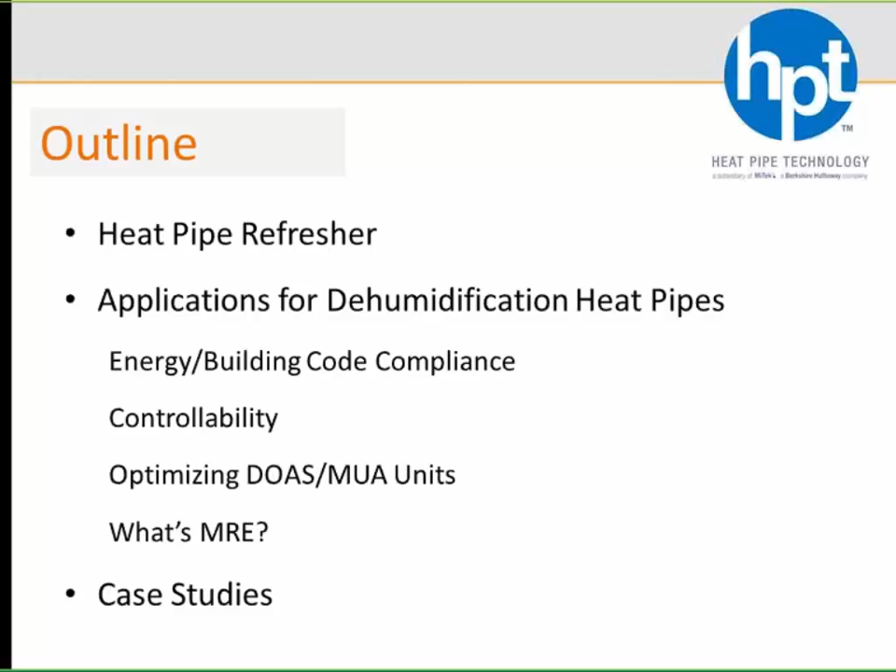So that right there is a basic heat pipe, as it's known today. It's simply a tube with refrigerant in it. If there's no delta T, refrigerant's just going to sit there. But as soon as you apply heat to one side, that refrigerant is going to pick up that heat, it's going to boil, and you're going to create a pressure differential within the heat pipe, and that vapor is going to move all by itself to the other end, where it'll give off the heat to the cooler airstream, and then that vapor turns back to a liquid, and it's going to go to the other side, pick up the heat, turn to a vapor, go back to the other side, and keep working all by itself with no pump, nothing like that. All you need is a delta T. You create a delta P, and that's the driving force within a heat pipe.

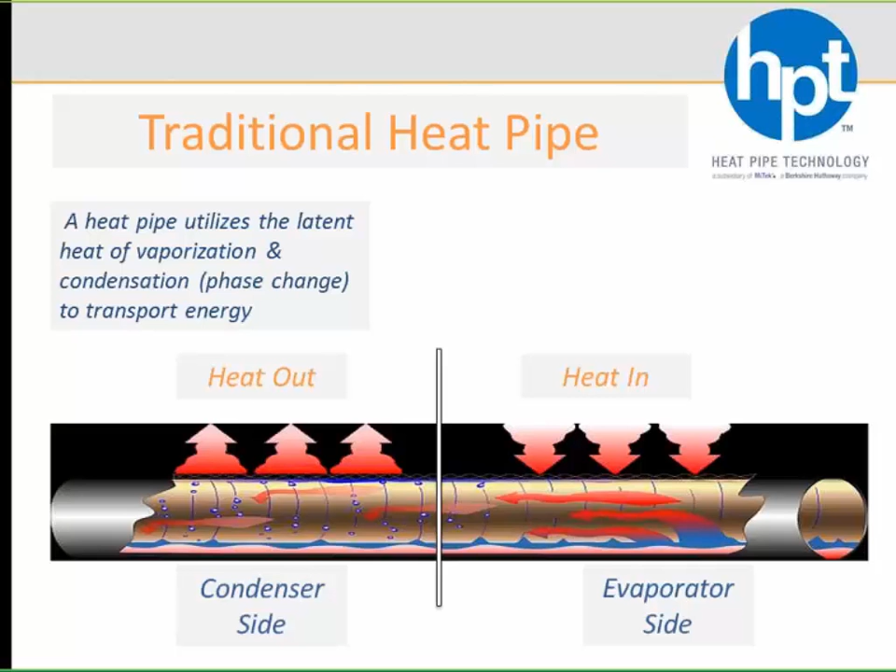Now that's what we call a single tube type circuit, where you've simply got a single tube. We at HPT do it a little bit differently. We use what we call a loop circuit. So instead of the liquid and the vapor traveling within the same diameter tube, battling forces, we've got the liquid going one way and the vapor going the other way, but all traveling in the same direction, like a racetrack, like you see here.

So in this scene, you've got the hot side on the right side. If there was no delta T, you just have liquid refrigerant sitting at the bottom of the loop there. As soon as you apply heat on the right side, that liquid's going to pick up the heat, vapor is going to go up that loop and around to the other side, give off the heat, condense to liquid, and it's going to keep moving in an oval like it's on a racetrack.

The fact that we do that allows us to use smaller tubes. So a lot of those single tube circuits that are still out there today are using big 1-inch aluminum tubes. We're able to use 1/2-inch copper tubes. That allows us to take up less space, get a little bit better performance, add less static pressure to the system, and it allows us to do some cool stuff.

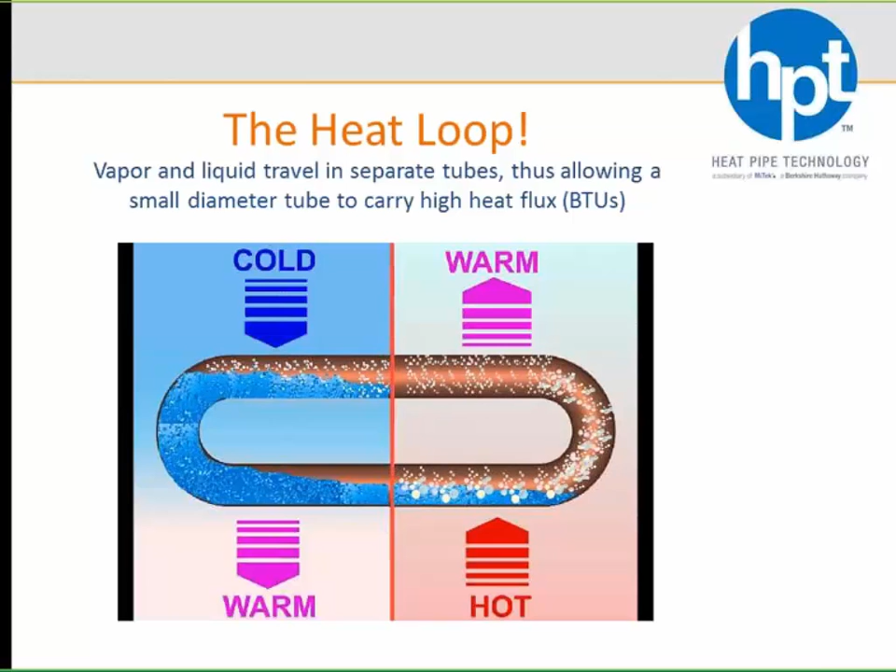So we take that concept and apply it to what we call a wraparound heat pipe. If it were just basic energy recovery, we would put one end on the hot side here and take this 80-degree air, pick up the heat with the refrigerant. It's going to boil, but it's going to go to another air stream and just dump off that heat.

In this case, we're wrapping that heat pipe around the cooling coil so that we can use that heat as free reheat. So as you can see here, we're not only pre-cooling that air before it enters the cooling coil, which is going to reduce the load on that cooling coil, but we're also giving you the free reheat as well.

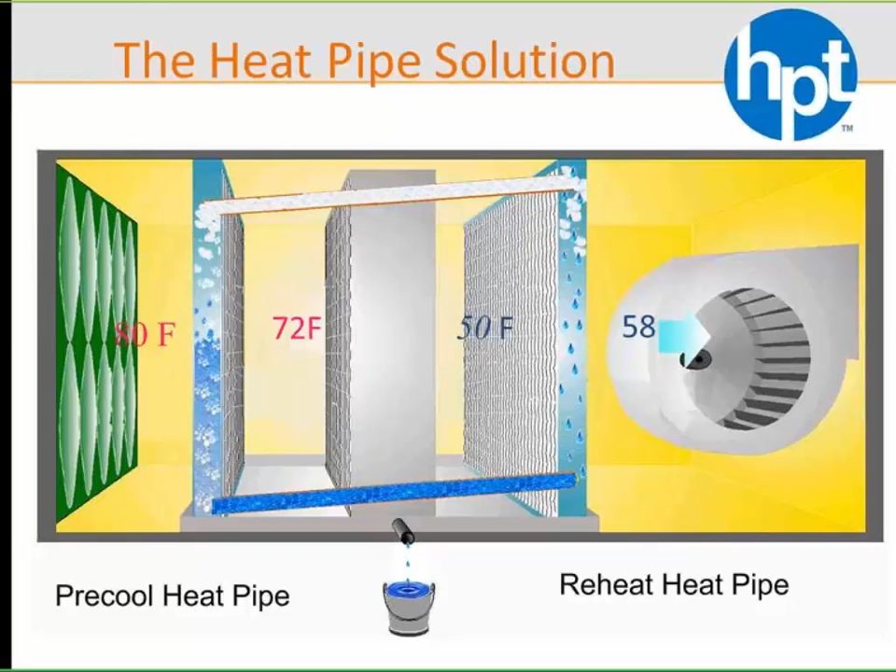And that's really the key to the wraparound heat pipe. If you just want to pre-cool, then just do heat recovery. Don't use something that's going to give you heat that you don't want. But if you are controlling humidity by using reheat, then the wraparound heat pipe is your answer, because it's not just giving you reheat for free, it's pre-cooling that air to do it. So you're doubling up your BTU efforts, so to speak.

So now we're going to look at a psych chart, because no fun webinar is complete without a psych chart. So if we did not have a wraparound heat pipe and you needed to get from 80-degree air down to 50-degree air off the cooling coil, you would have to go all the way from point A through point B all the way to point C, and that's how much coil you need, so to speak.

When we apply the wraparound heat pipe, which is a sensible recovery device, we are going to pre-cool that sensible heat and, in essence, allow that cooling coil to not work as hard. So the pre-cool side of the wraparound heat pipe will pre-cool from point A down to point B.

And now, as you can see, you need a smaller coil because you only have to get from point B to point C. And then, of course, the heat that was recovered from A to B is then wrapped around the cooling coil and added as reheat from point C to point D.

Now, the other way you could do this is if you used the same size coil as before. Instead of going down to a 50-degree dew point, now that coil can handle more latent capacity and drive that dew point down even further as it's able to ride the saturation line a lot further. So we'll take a closer look at both of those scenarios as we move forward.

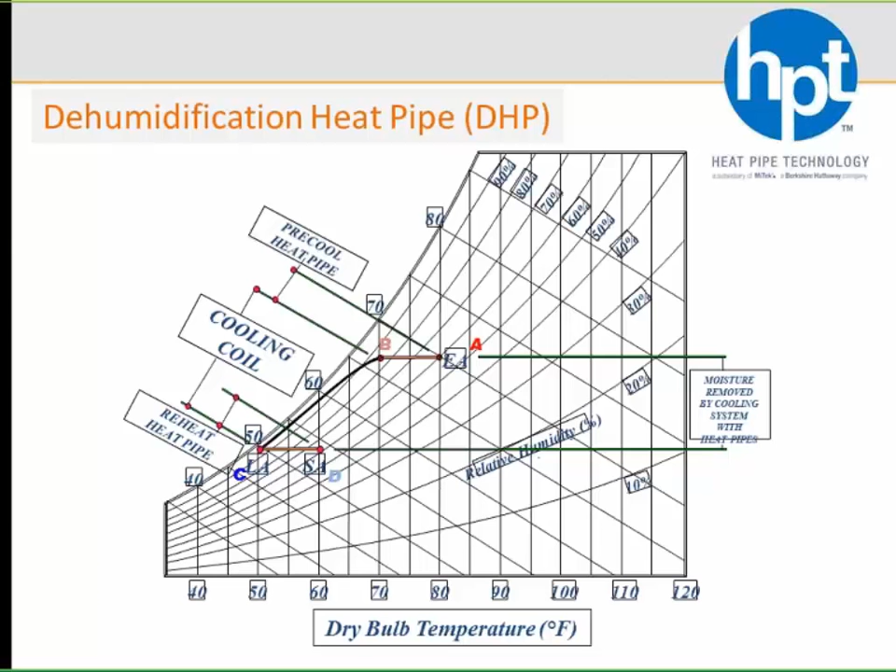I'd also like to point out that the dehumidification heat pipe is commonly known as the wraparound heat pipe, but we have the model number DHP. So when you see DHP, know that that is the dehumidification heat pipe, or the wraparound heat pipe, as shown at the top there.

So one application that it can be immediately used, and is very often used, is to meet energy code or building code. So 90.1, and therefore most, if not all, state building codes that are based on 90.1, are going to tell you that depending on where you are in the country or what climate zone you're in, and depending on how much outside air you're bringing in and what percentage of your total airflow is outside air, you have to have energy recovery that's able to recover at least half of the total enthalpy that's available.

Now, there's certainly ways to do that. A lot of them can get expensive, but there are also some exceptions to that requirement. There are several, but the one I want to focus on simply states: if energy recovery in series, as it's quoted, is used for dehumidification, then you don't have to do anything else to meet this code requirement.

So basically, energy recovery in series, what is that? That's what a wraparound heat pipe is doing. We're recovering heat on one side of the cooling coil, and in the same series of airflow, redistributing that heat as reheat.

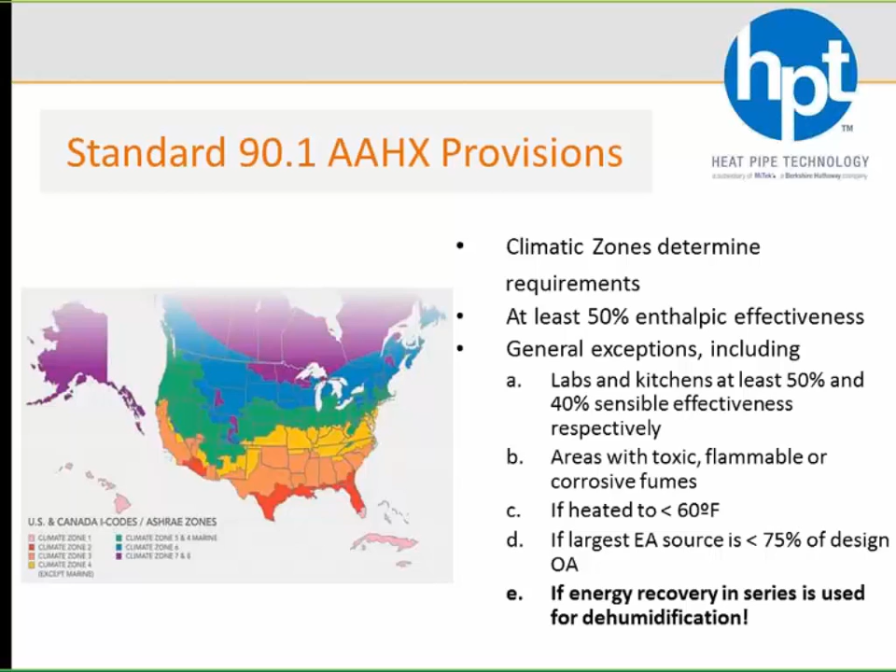So let's talk about controllable wraparound heat pipes, because that is something that's one of our bread and butters that you don't get everywhere else with some other heat pipes. I really want to talk about what it is, some of the details, and then how best to utilize them.

First of all, know that when we're talking about a controllable heat pipe, we are typically using solenoid valves. We're basically installing these solenoid valves in each circuit and shutting them off and opening them back up as needed, staging them together as needed for the BAS, and we'll get into that as well.

These solenoid valves can be either 24 volt or 120 volt, and that voltage is really based on the number or quantity of valves. 24 valves or less, we're going to stay at 24 volts. When we go up past 24 valves, we're going to go to 120 because the wiring just gets too big. That's the difference between the 24 volt and the 120 volt.

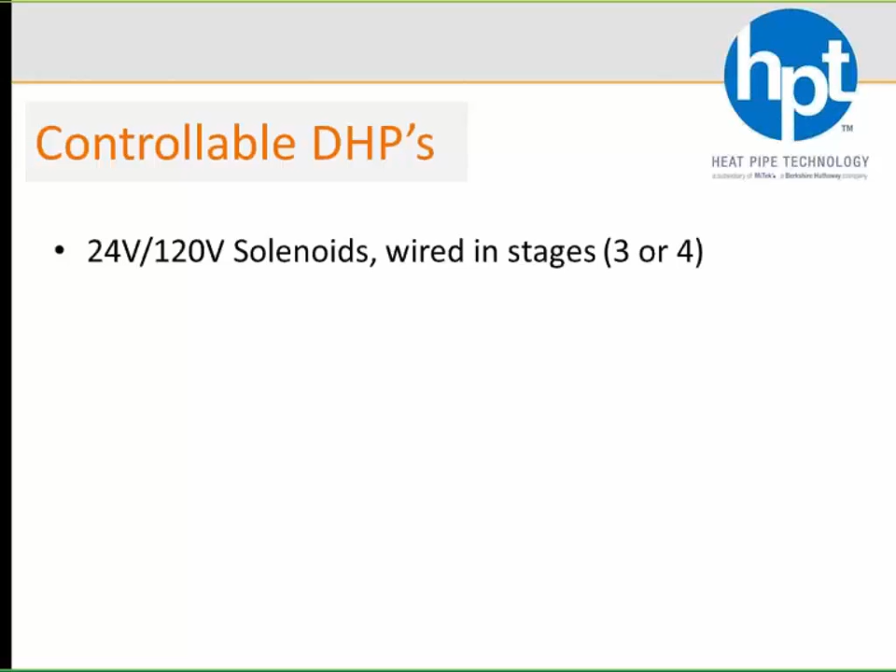Well, the reason is because we slant that piping up towards the reheat, because on the pre-cool side, when we pick up that heat, that refrigerant's going to boil, turn into a vapor, and we want that vapor to go up. And then, more importantly, when it gives off that heat and condenses back to a liquid, it's nice to have that liquid slope down.

So when thinking about that, one question we get sometimes is, what's the wraparound heat pipe doing during heating mode? Is it working against you? The answer is no. When we're in heating mode, first of all, now you've got cold air entering, and that liquid refrigerant is just going to sit at the bottom there, and it's not going to go up anyway.

But also, and more importantly, typically that cooling coil is not going to be on during heating mode, and if it's not on, there's no delta T across the heat pipe, and without a delta T, we're not going to do anything.

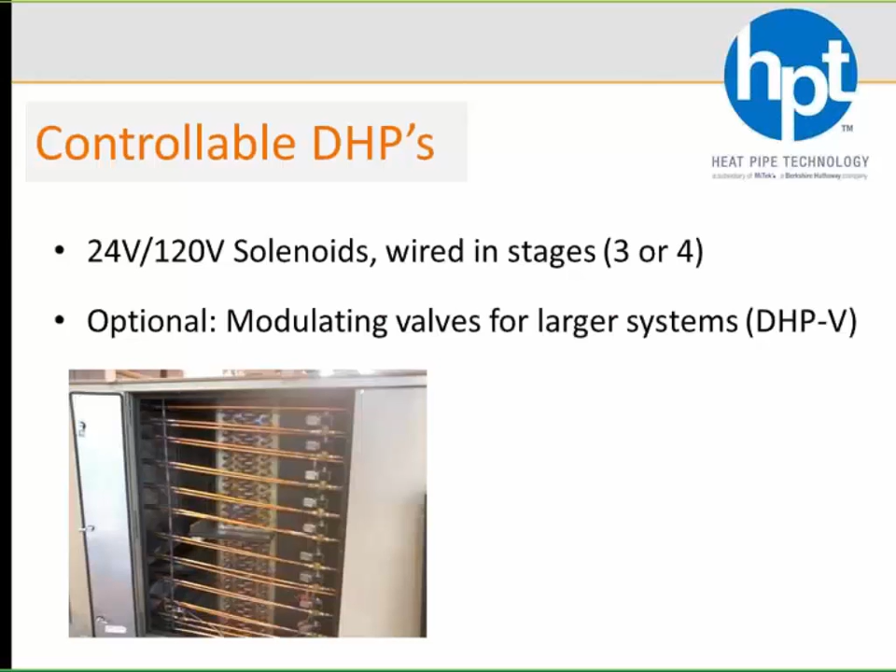Now, when we get into larger systems, and larger systems means a larger heat pipe, means more circuits, and when we get into a lot of circuits where there's going to be a lot of solenoid valves, it gets to a point from an ownership standpoint that it no longer makes sense. And then we do something a little bit differently.

We actually are able to use modulating valves, but we have to use a different heat pipe, what we call our DHPV here. For those familiar with our HRMV, or our split passive heat recovery module, it's basically the same thing, except now we've wrapped it around the cooling coil.

So in this case, we've taken every 2 rows as its own circuit. So what you're seeing there is a 2-row wraparound heat pipe where you've got vertical tubes in this case being tied into common headers. Because the good thing is that allows us to use much fewer valves, and we're talking modulating valves now that can modulate that heat recovery versus just staging it.

The downside here is that you do lose a little bit of performance, because pulling many circuits into common headers is going to lose some performance for you. So we only go this route when it certainly calls for it. We like to capitalize on the performance of the wraparound as much as possible.

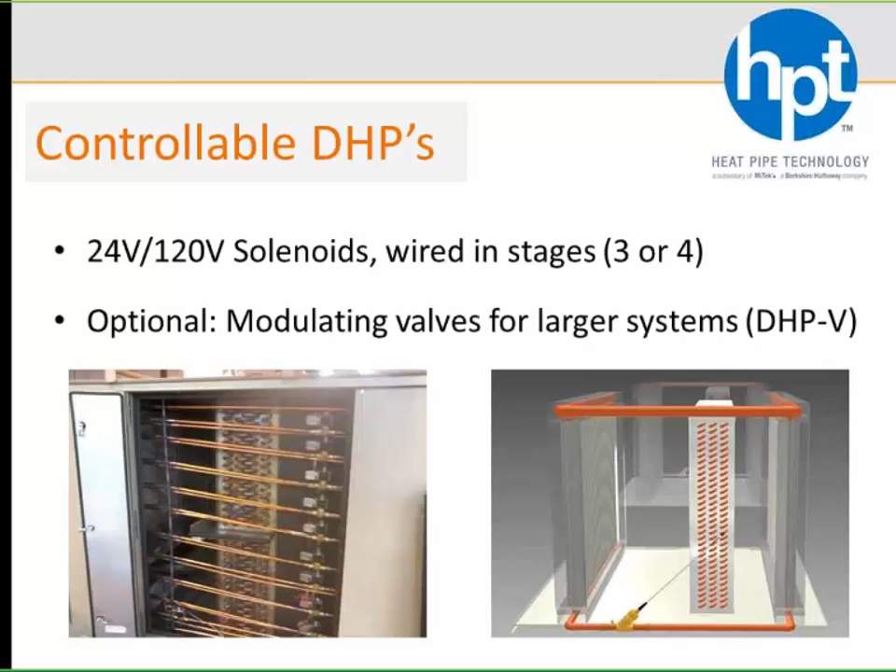So that's what we do. But the big question is why? Why would we even use a controllable heat pipe? Surely it's going to cost a little bit more than a regular heat pipe. That's a fair guess and a correct one. We don't give our valves away for free, so why would you pay extra for it?

Well, the easy answer is that you can control or maintain a set point without overheating. If you're not controlling the heat pipe and it's simply driven by delta T, then if the cooling coil is supplying the same temperature off the coil all the time, but the entering air gets warmer and warmer, that means the delta T is getting bigger and we're recovering more heat and therefore providing more reheat. And you might come to a point where you don't want all that reheat. If you don't have control valves, then you're just going to have too hot air that you're going to have to do something else to overcome.

But if you put control valves on it, then you can stage off a circuit to get that heat down. And if it's still too hot, stage off another circuit until you get it down to that set point that you need. So take a quick look here.

Here's a scenario I ran in Jacksonville, 10,000 CFM unit. We're going to assume that there's 50-degree air coming off the cooling coil, and the maximum allowable leaving air temperature out of the air handler for this design is, let's just say, 65 degrees. So we don't want the air to get any hotter than that. And we'll look at payback and stuff, so we'll use some local utility rates in Jacksonville, but these can certainly be applied to anywhere.

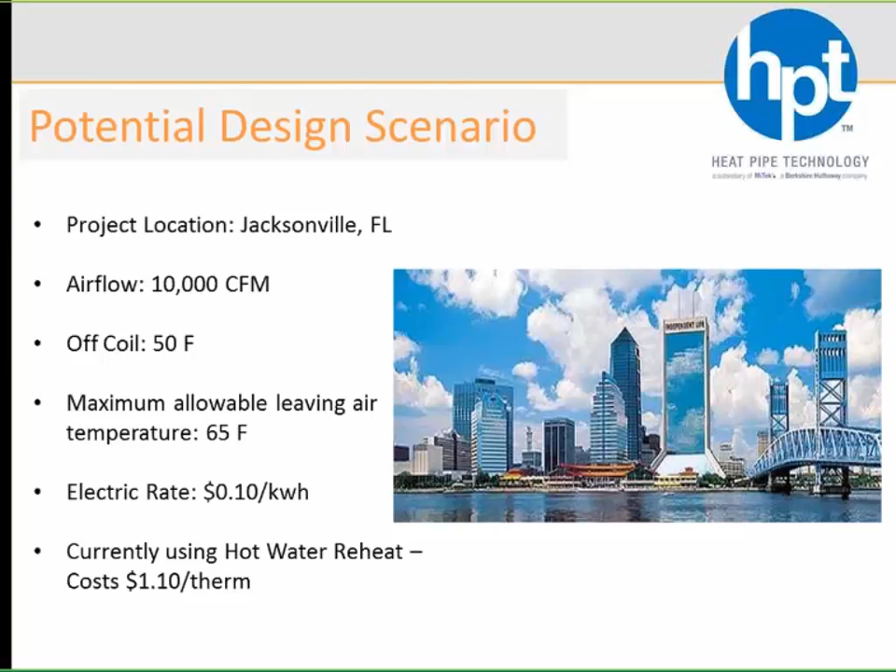So if we took just a two-row non-controllable heat pipe, two-row is pretty common. As you can see, two-row gives you anywhere between 8 and 15 degrees based on that overall delta T. In this case, at 95 degrees, 50 degree air, we're pre-cooling and reheating a little over 13 degrees or so.

So that's great. Now we're heating it up to 63.5 degrees. But if we want to get up to 65, well then we're underperforming. And yes, you could leave it as is. You're never going to get too hot, and you're never going to have to worry about controlling it, and you are good to go. But if your focus is to save as much energy as possible, well then you're underperforming because you're not taking advantage of the fact that you can reheat up to 65 degrees all the time. So how do you get up to 65 degrees?

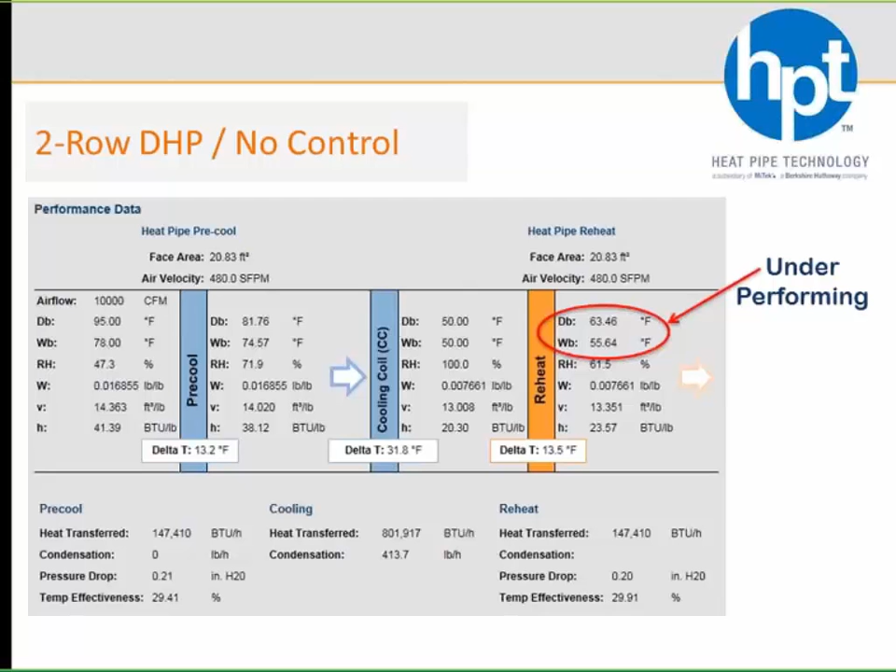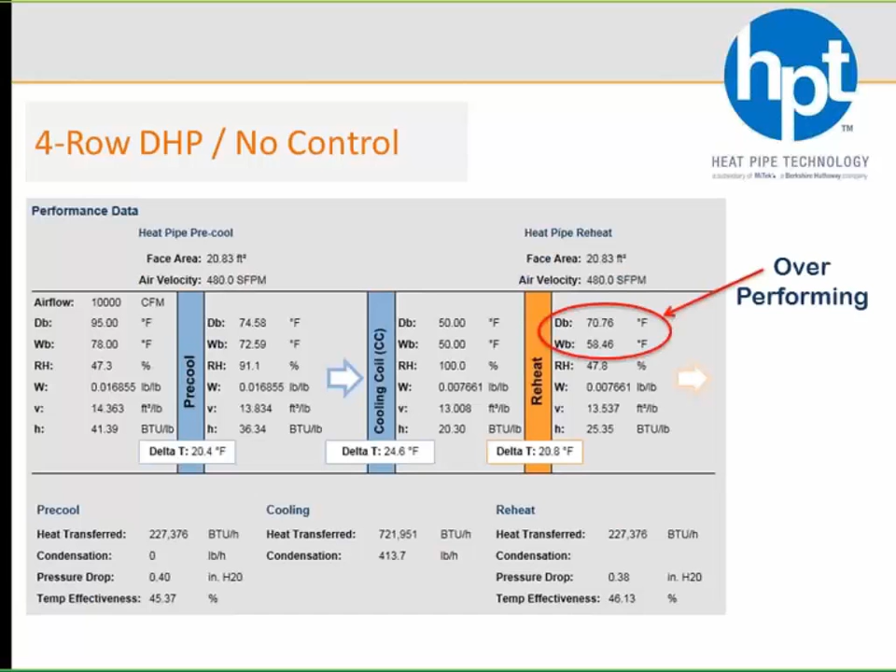You add more rows. So what do we do if we go up to a 4-row wraparound heat pipe? Well, obviously, you add more rows, you're going to recover more heat both on the pre-cool side and therefore on the reheat side. So you can see that instead of reheating and pre-cooling by 13 plus degrees, now we're doing it 20 plus degrees. And obviously, that is too hot. So if you need to get to 65 on these peak days, well, now it's too hot.

So what do you do? You add control valves. So now on these peak days, you shut off a circuit and it's going to back it down to 65 degrees, or if that's still too hot, then you stage off another circuit, and so on, so that you're capitalizing on the allowable reheat as often as possible to maximize the energy savings at all times.

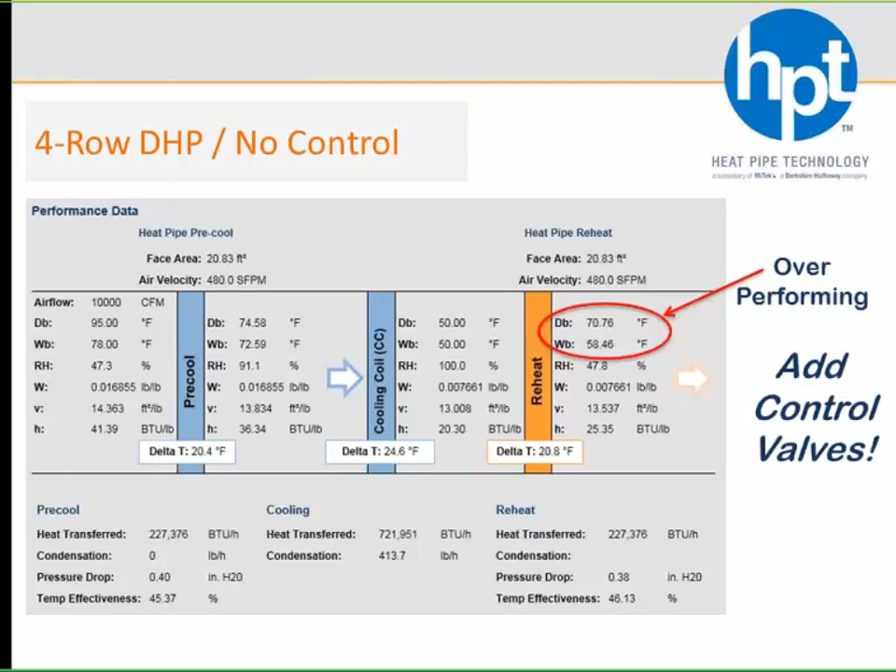So a better way to look at it, instead of just controlling to a set point, is actually sizing the heat pipe for part load performance. Because according to ASHRAE, that peak day is 1% of the time. Now, whether it's 1%, 2%, 5%, 10% of the time, regardless, it's a small percentage of the overall time. So like anything, you hear this argument on the chiller side and other equipment all the time. Why size it for the time where you're spending the least? Why don't you size it for the time you're spending the most?

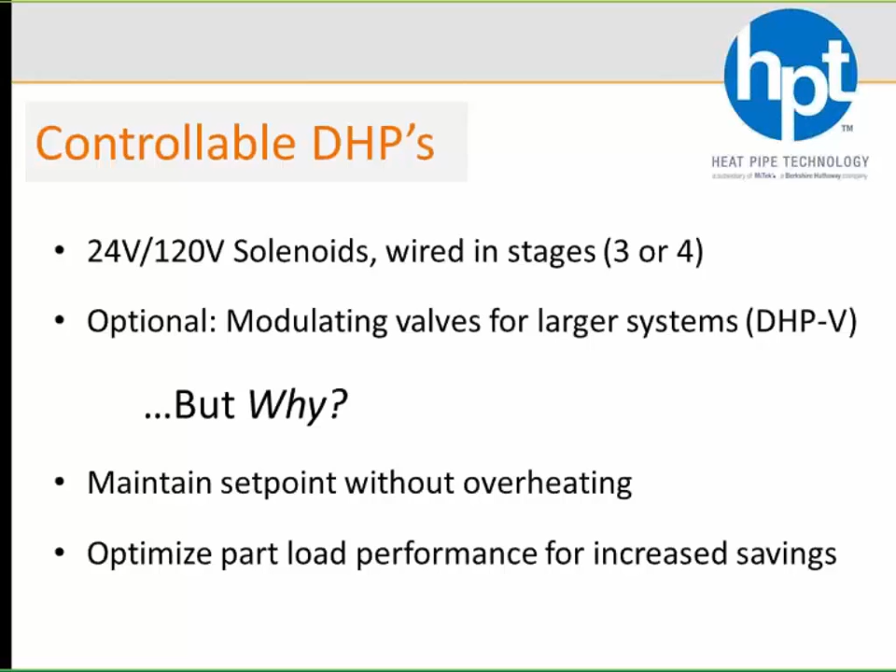So that's you feel the same way about a wraparound heat pipe. Size it for those part load days where you're spending most of your time. Get as much performance as you can, and then on those peak days, just start shutting off circuits so you don't overheat the space, but you're always maximizing your performance.

And that's great savings, nothing wrong with that. But if you want to capitalize and optimize your savings, then not just add the rows, but make it controllable so you don't get too hot on those peak days.

But we're still too hot on those peak days, so we're going to have to shut off some circuits on the very hot days. But the rest of the time, you are getting more BTUs than you would have if you had less rows.

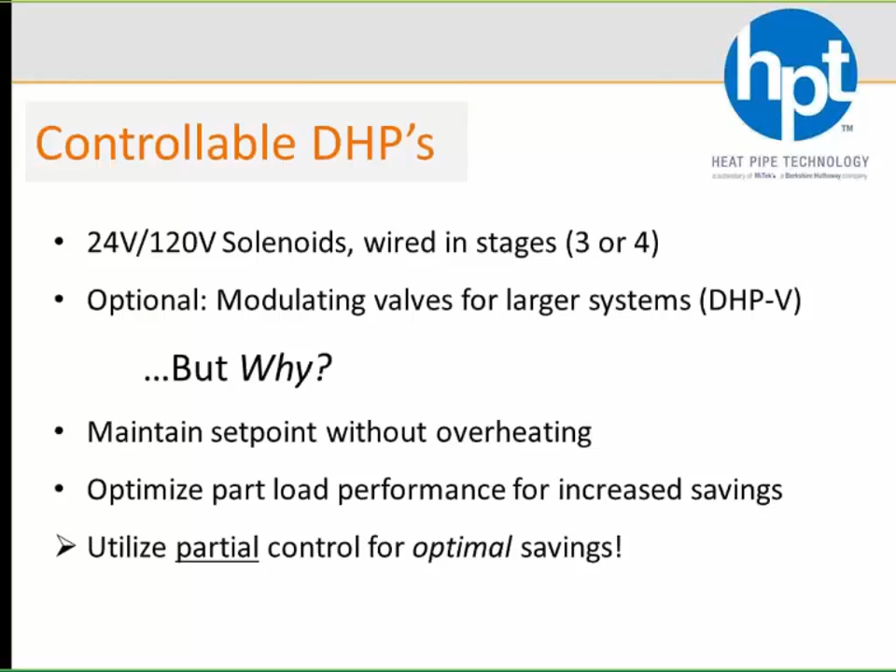If you're always going to need some reheat, then why put valves on every circuit? Why not just put valves on enough circuits to shave the load, to shave that extra reheat on the peak days, but always get you that, let's just say, 5 degrees of reheat at all times? Well, now you've truly optimized the system.

So taking it a step further, first of all, if we made it 50% controllable, now we've got half as many valves on there. If you've got half as many valves, you've got half as much friction loss. So you've got, give or take, half as much of a performance hit, let's say. So now you're actually going to get even more BTUs all the time.

You're still adding the same amount of static because it's still 4 rows. But because you're adding half as many valves, it's not going to cost as much. You don't pay for those extra valves that you didn't need in the first place. So it's going to cost less, it's going to save more. So now your payback is going to be even quicker, and you've truly optimized the system.

So I would recommend anytime you're considering using a wraparound heat pipe, and the focus, which it should be, is to save as much energy as possible while also keeping the budget down. Ask yourself, have I sized it for part load, and do I need valves on every circuit? And we'll always be happy to work with you on that and figure out what is the best approach.

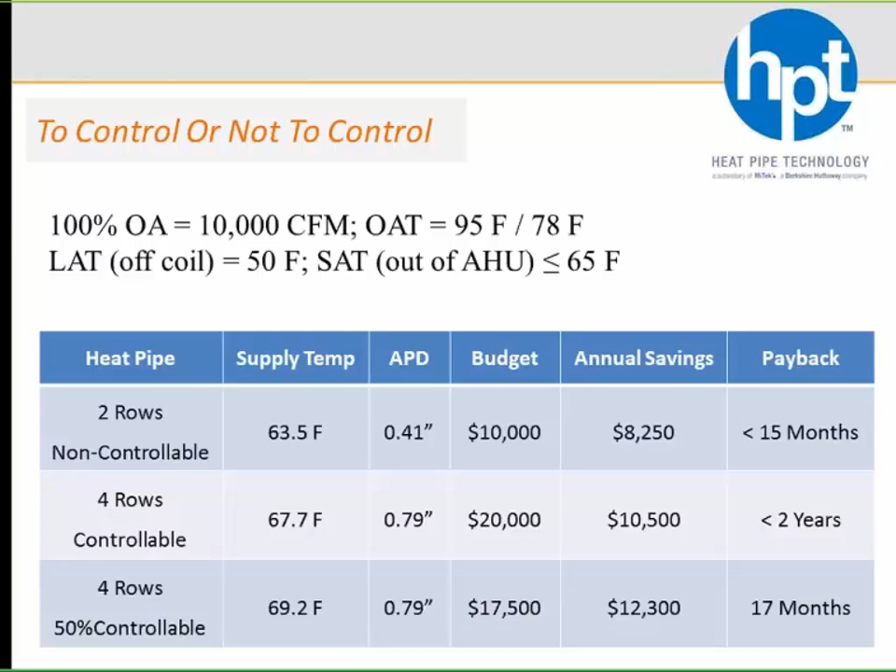So let's talk about DOAS units.

Typically, a DOAS unit is a DX unit handling all ventilation air, and a common way to get some free energy with a DOAS unit is to use hot gas reheat. Now, some DOAS units aren't DX, some are chill water, and if you're using chill water, you don't have the benefit of hot gas reheat. So the wraparound heat pipe will give you that free reheat on a dedicated outside air unit where hot gas reheat is no longer available.

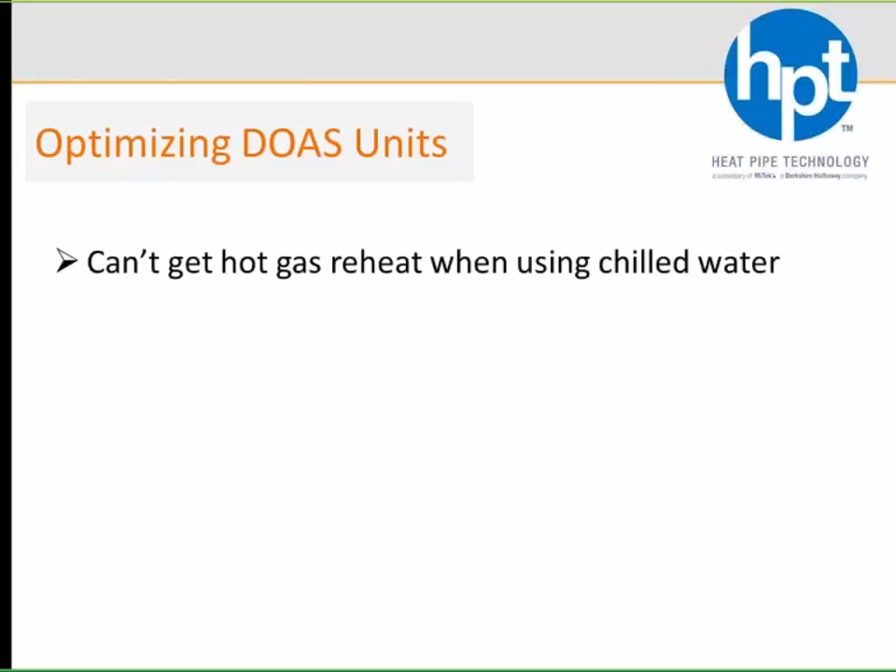But even if it is a DX unit, hot gas reheat is simply waste heat, which isn't bad, but it's free reheat. With the heat pipe, we're also providing free reheat, but we're also pre-cooling to get our reheat, so we're going to offer twice as much BTU savings than hot gas reheat would. And there's a surprise element to that, because when you're pre-cooling, you're also reducing the load on your cooling coil. And when you reduce that load, you can really see the benefit of the wraparound heat pipe, because you can get a smaller DOAS unit and make it more efficient.

So let's look at a quick example. Here's a 25-ton DOAS unit, and if we didn't have a heat pipe on it, let's say this 25-ton unit is going to get down to a dew point of 52 degrees off the cooling coil, and this unit has an EER of 13. That's pretty common, and if anybody wants to see any of this supporting documentation afterwards, just let me know, I'll be happy to get you any of this stuff.

But this is a number I got from someone else. So let's say we put a wraparound heat pipe on it. Now if we need 25 tons, we don't need a 25-ton unit, because the heat pipe is going to handle some of that cooling load for you. So you could get away with a 20-ton unit that has a heat pipe doing 5 more tons for you. So you've got a net 25-ton unit, still getting down to that 52-degree dew point. But the key here is, one, you just made the unit smaller. But more importantly, or just as importantly, that 5 tons is being added using a lot less energy, which is increasing the EER. So instead of having 5 more tons of compressor working for you, you're basically adding just a little bit of static pressure to the system with the heat pipe that doesn't require any power, and that little bit of static pressure takes a lot less energy than 5 tons of compressor.

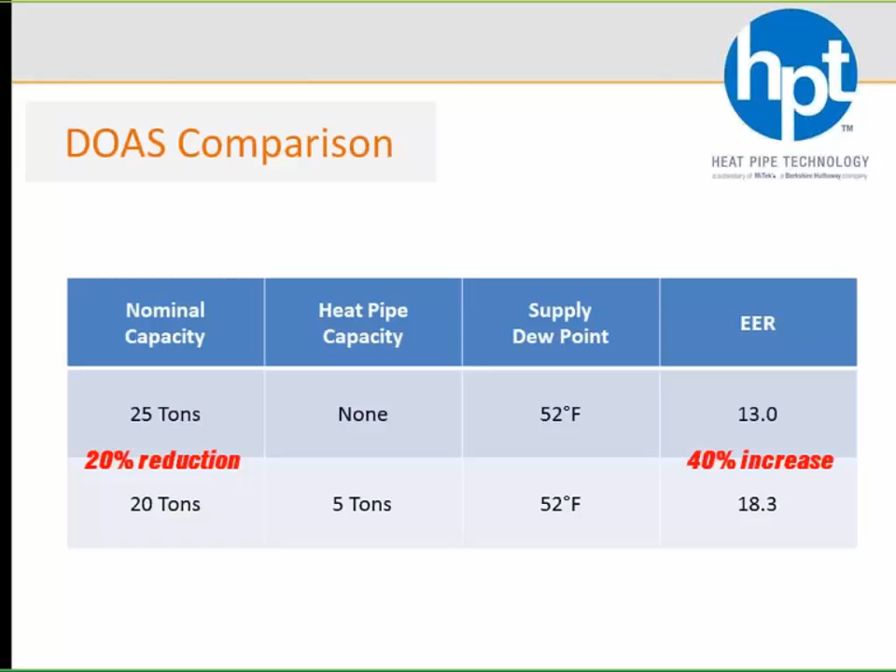And so in this case, the EER jumped up 40%, all the way to 18. So not only are you going to make it smaller, which makes it lighter, which reduces the electrical load, but it also makes the cost a wash, which is pretty awesome. And what do I mean by that? Yes, you pay more for the heat pipe, but the reduction in price from going from a 25-ton unit to a 20-ton unit oftentimes ends up being a wash. So you can tell the owner, hey, you can pay the same amount, get a smaller unit, and it'll perform more efficiently than if we didn't put this on there. So it's pretty much a win-win.

So some of you might be asking, why don't we do this all the time? The answer is pretty simple: unfortunately, when it comes to DX equipment, there's not a lot of room in those units. The wraparound heat pipe, even though it's not that big, does require some space. With modular air handlers and such, you can create the space you need, but when it comes to set model sizes of DOAS units and makeup air units, there's not a lot of space. They cram it in as tight a space as possible and don't leave a lot of room for outside things like heat pipes. But that's on us, and we are talking to all DOAS manufacturers. They're starting to see the value in it, so you might start seeing some changes here soon.

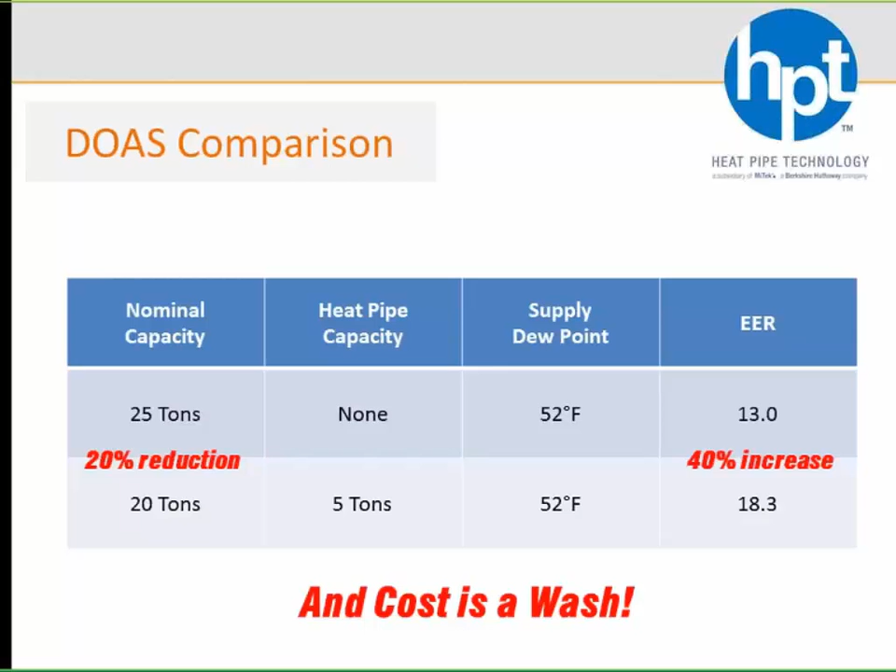And if you talk to some of those manufacturers or represent some of them, hearing that from both ends would certainly help the cause. But there are things in the works that are starting to give us more space. On top of that, we install these wraparound heat pipes at our place as well, and some of these units we're able to modify ourselves, as long as we don't have to start moving and disconnecting any piping. But we can move filter racks and stuff like that. So always send us drawings and we'll see if we can pull this off for you.

Another note on DOAS units: typically they're decoupled and have other terminal units downstream to handle the sensible load. That's why DOAS units strictly there to handle humidity tend to have warmer discharge air than a mixed air system would. The warmer that air can be, the more reheat and pre-cooling we can do. So the more reheat that's allowed, the better we perform and the more savings you get.

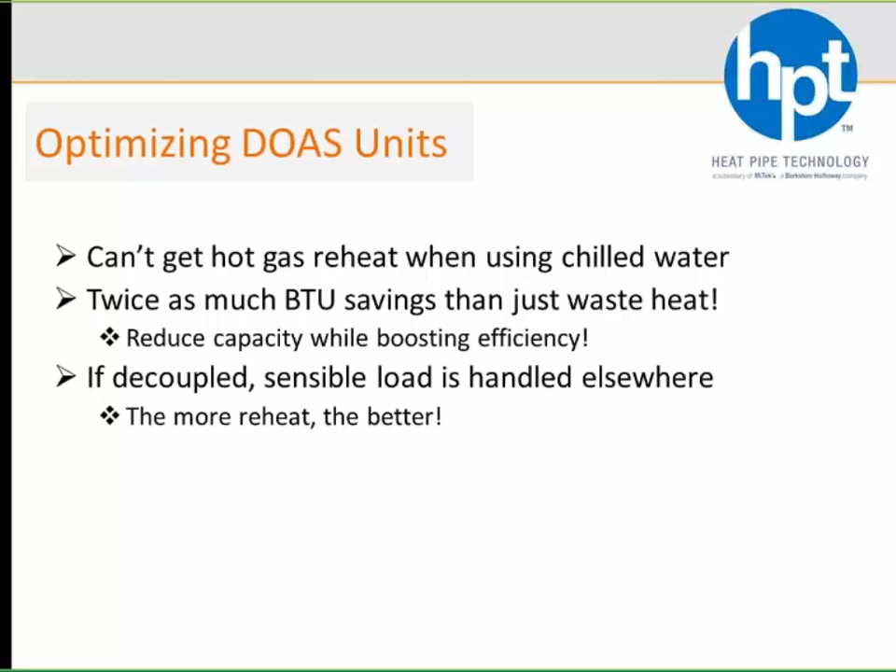That's why we work very well with DOAS systems, because they tend to have a bit more reheat associated with them anyway. Chilled beams are another cool application, and a lot of DOAS units are used to deliver the primary air for chilled beam systems.

A quick summary of chilled beams for those unfamiliar: they're basically diffusers out in the space that have a coil in them, and these beams induce air locally across that coil to handle sensible load in the space, so the air handlers upstream don't have to provide as much air. The goal is to reduce fan energy by adding a little pumping energy to send water back and forth from these beams.

The downside is that providing less air means you have less air to dehumidify the space, and there's the same moisture level out there, so that's not going to change. The only way to battle less air is to provide drier air. A lot of times there may not be much humidity to control anyway, or you might control to a higher RH set point, in which a basic chilled water or DX system can work fine, maybe with just a little boost on the coil side.

But oftentimes there's a pressing need to go to a lower dew point to avoid the risk of not providing dry enough air. You'll find that the allowable dew point of that primary air can be somewhere in between, and the wraparound heat pipe will allow you to hit that point. It's not going to get down to those really low dew points that expensive desiccant systems can get to, but it can help the basic cooling coil drive down that dew point further.

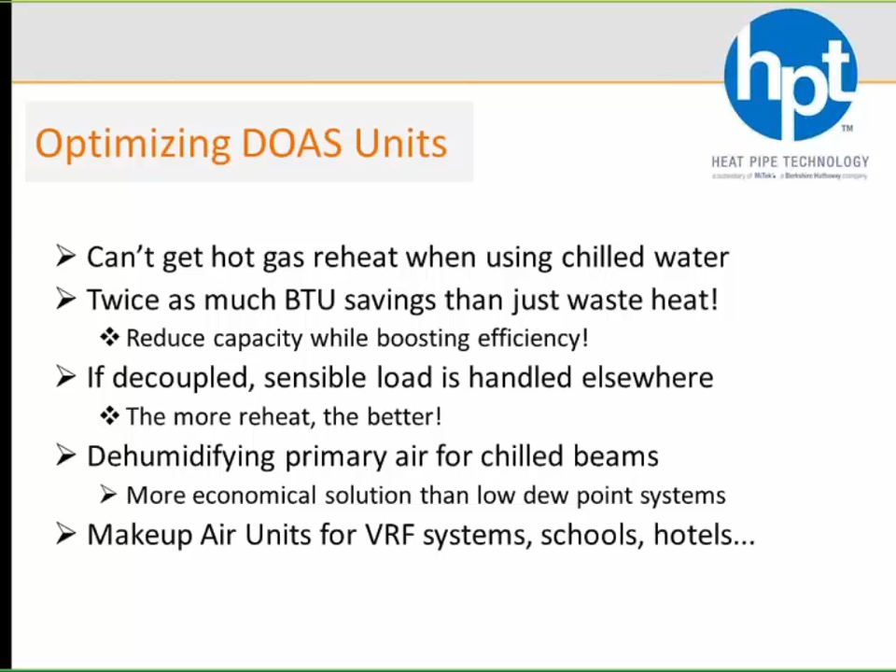In hotels, we see them a lot, especially in common areas where you're providing all that pre-treated outside air, but you don't want to freeze it because there's not a lot of traffic, so you reheat it back up anyway. So if you see any hotel applications, it's a great application for a wraparound heat pipe.

Some other applications, a little off the wall: underfloor air distribution or displacement type ventilation. Now you've got air, instead of delivering overhead, delivering down at your feet or ankle area. If that's the case, overhead you send it out cold because by the time it gets to the people, it's not as cold. But if you deliver it down at your feet, it's cold, so you have to deliver a little bit warmer.

Anytime you have to control the humidity but then reheat it back up, it's a great application for the wraparound heat pipe. Underfloor air is very much in that zone, because you still have to dehumidify the space just as much, but you have to reheat the air back up. So let the wraparound heat pipe do that for you.

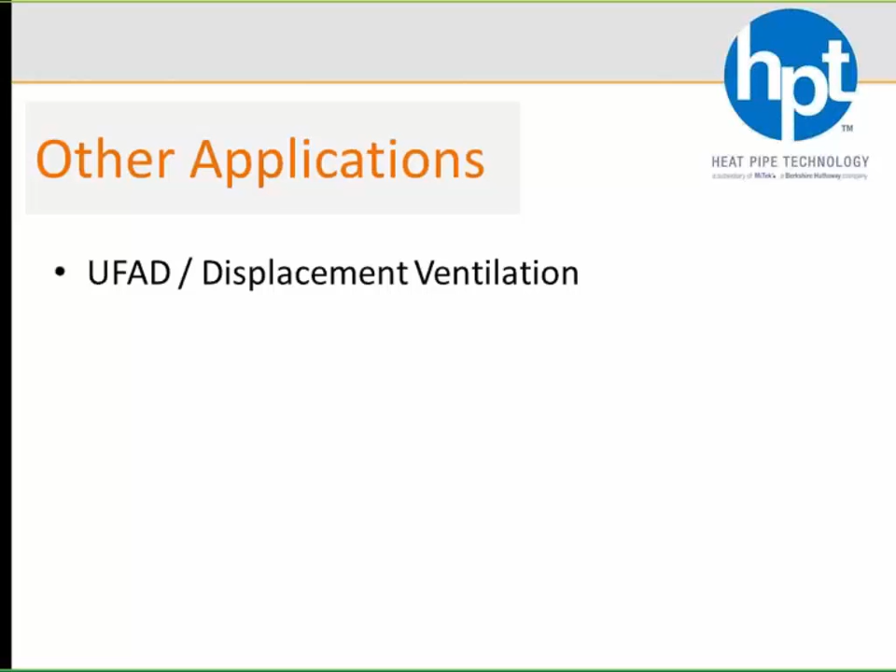Pool dehumidification as well. Obviously, for indoor pools, there's a lot of humidity, regardless of whether it's outside air or recirculated air, so there's a lot to control. But you don't want it to be cold, you don't want to send cold air out to a pool area, or not a lot of people are going to swim in that pool. So you want to reduce the load on that cooling coil while heating it back up. Again, a perfect application for the wraparound heat pipe.

Two-pipe systems, you don't see a lot of those these days, but they're still out there. For those not familiar, you've got your two-pipe and your four-pipe system. Four-pipe means you've got supply and return chilled water plus supply and return hot water.

Two-pipe means you've only got one or the other, and oftentimes you have a changeover. So in cooling season, you've got supply and return chilled water. In heating season, it switches over to supply and return hot water.

But let's say it's cooling season, and yes, you've got to control humidity. Well, you can't add hot water to it for the reheat. You can't do that anyway now because 90.1 says you can't simultaneously heat and cool. But besides that, even if you were to try to use electric heat as reheat, that is very expensive.

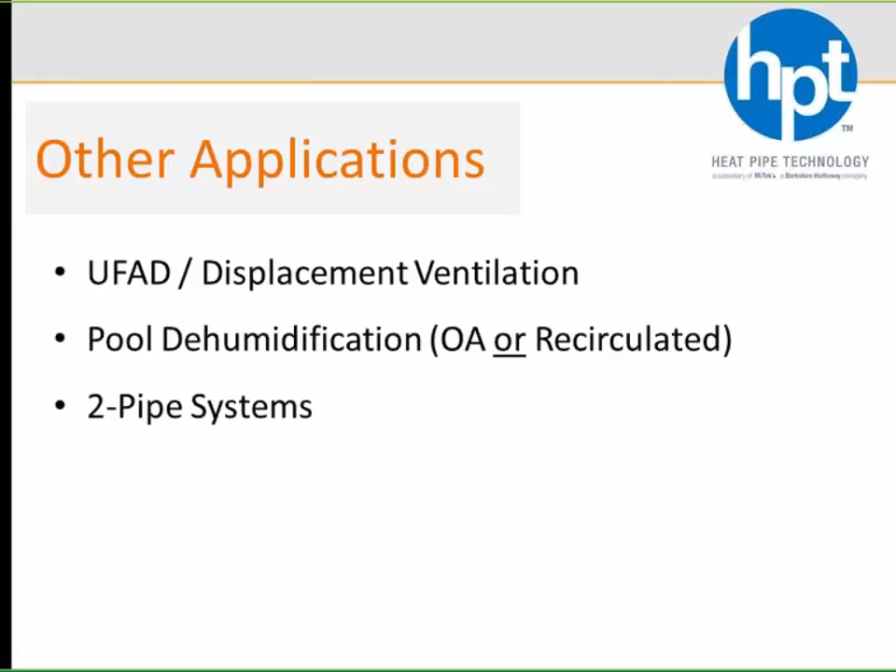Another call that we commonly get is when final filters are wet. You've probably heard this before. Why are our final filters all soaked? Well, typically it's because it's a blow-through fan configuration, meaning that fan is not downstream of the cooling coil. It's upstream, blowing air through it and then through final filters.

So what happens is you lose the extra reheat that the fan motor adds to the system. When the air is coming off the cooling coil, it's typically saturated, and when you add fan heat, it pulls the air off saturation. But if it's blow-through, you don't have that extra heat, so now you have this saturated air going through these final filters, and when it experiences the pressure drop, that saturated air condenses to a liquid and gets your filters all soaked.

So we find that simply adding a one-row wraparound heat pipe is enough reheat to pull that air off of saturation, kind of take the place of the fan heat that's no longer there, and it's going to get you a little pre-cooling while you're at it. So if you have any blow-through type configurations, always consider just a quick little one-row wraparound heat pipe to help avoid those problems. And again, we install these wraparound heat pipes in the field as well.

We don't just do them at our place, and we don't just send them to the manufacturers, we'll do them out in the field. So if you have any existing jobs where final filters are getting wet, give us a call, and we'll see if there's enough space to put a small one-row wraparound heat pipe on it and take care of that for you.

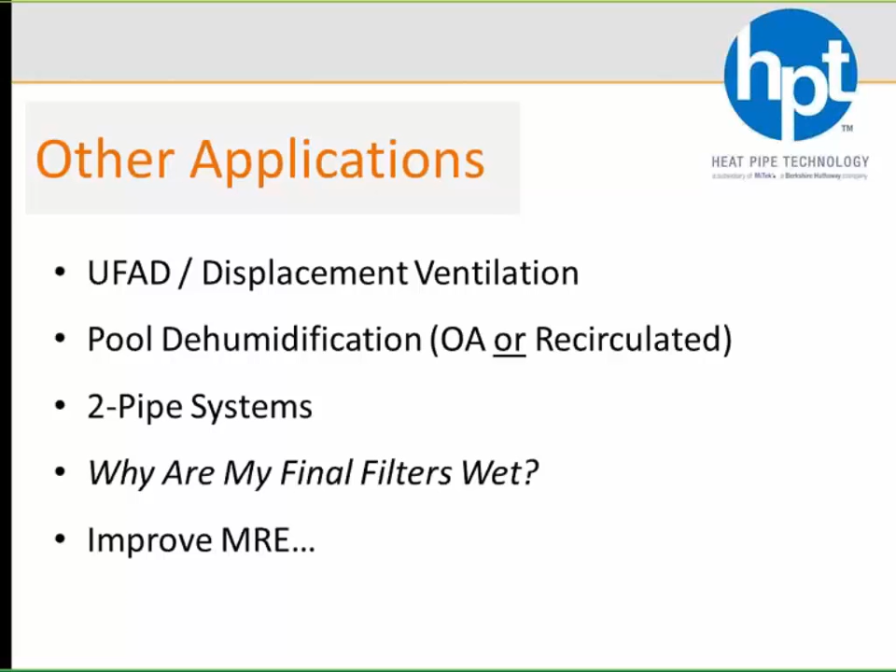And of course, I mentioned this earlier, but MRE, we're going to help improve MRE. And I'm sure most of you are asking, Drew, what is MRE? That's an excellent question, and fortunately I have a slide here that will answer that. So if you've been listening to us talk for the last several years, you've heard us talk about a metric called RER. RER is strictly for energy recovery, the recovery efficiency ratio.

So where effectiveness is basically measuring the capacity of that device, or the amount of BTUs it's able to recover, RER takes into account how much power is being added to the system to go get those BTUs. So something like a wheel is getting a lot of BTUs and has a high effectiveness, but it's adding a lot of static, it's got extra air for purge, leaks, and a motor turning that wheel, so there's more power involved. A heat pipe is simply adding static pressure, so it just requires a little bit of fan energy. Well, this MRE is not to do with energy recovery, it's all about moisture removal.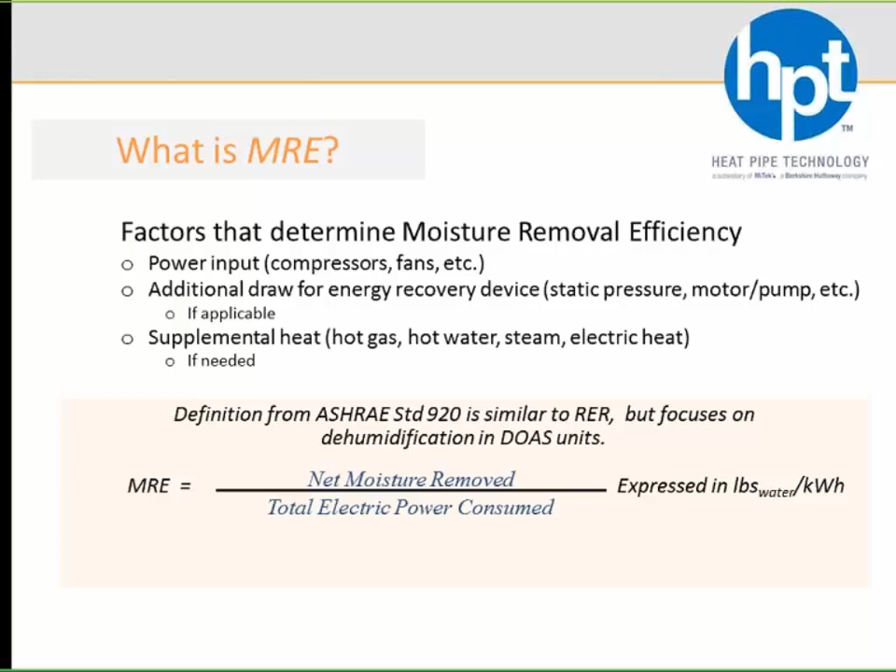There's an upcoming standard called 920 that will be coming out soon, which is a standard for performance on dedicated outside air units. Within standard 920, you'll find a metric called MRE, where they measure the moisture removed per the power consumed to remove that moisture. In other words, it's the pounds of water per hour removed from the system for every kilowatt needed to go get it.

So how can a wraparound heat pipe help with that? Let's go back to that 25-ton DOAS unit. Again, if we don't have a heat pipe on it, that 25-ton unit that gets down to a 52-degree dew point removes about 162 pounds per hour of water, and it needs about 29 kilowatts of power to remove all that moisture. So if we divide the moisture removal by the power, you get an MRE of 5.6 pounds per kilowatt hour.

Now let's say we add a wraparound heat pipe to it. In this example, unlike the other one where we shrank the unit and got the same total capacity, here we take the same unit and add a wraparound heat pipe so it handles some sensible load, allowing the DOAS unit and that coil to handle more of the latent load.

So instead of driving that dew point down to 52 degrees, the heat pipe allows that cooling coil to drive down to a lower dew point, in this case 48 degrees. Now we've removed more moisture, and we've added very little power, because all we've done is add static pressure to the system, and not much if it's a two-row heat pipe. So it's just a little bit of fan power.

You can see that all we did was bump up the power from 29 to 29.2 kilowatts. So we increased the moisture removal by about 10%, and because that extra power is so small, we've actually increased the MRE by about 10% as well.

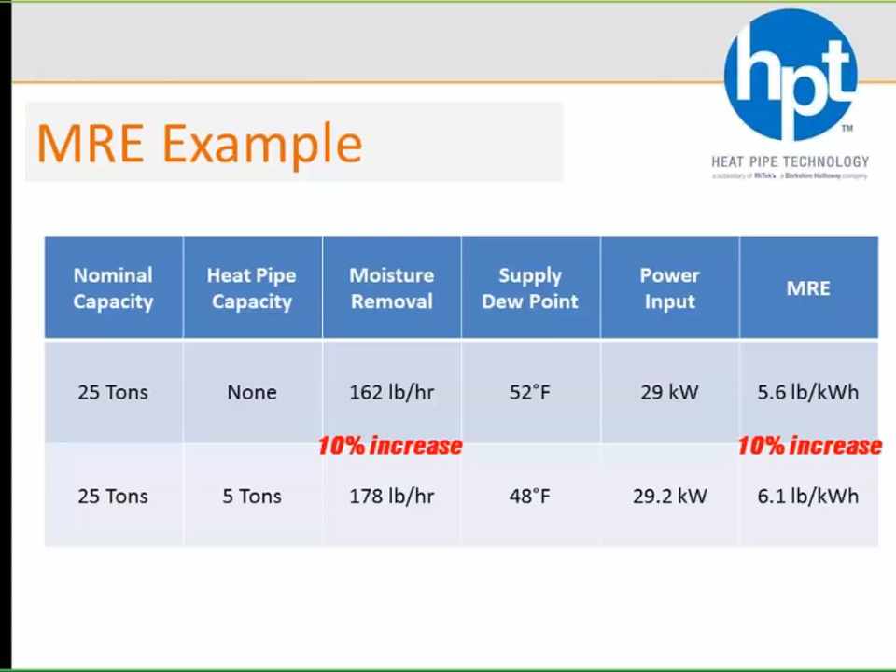So you're going to start seeing this. If you're involved with dedicated outside air units, you're going to start seeing this soon, because 920 isn't out yet, but it's coming. It's pretty apparent to us that it's known it's coming, because we've been talking to the outside air companies a lot more frequently in recent days than we have in the past, and it's all because of this MRE that they're going to be judged on. The wraparound heat pipe is a way to boost MRE by adding very little power to the system, as you can see.

Finally, I just want to talk about a couple of cool case studies. One is here in Tampa, the Amalie Arena with the Lightning play. Several years ago, this is going to be shocking, but Tampa was known for having some of the worst ice quality in the NHL. Who would have thought? So they wanted to do something about that.

So they designed this very expensive desiccant system to really dry out the air. It involved an expensive system on the roof, gas going up to it, all kinds of good stuff. Problem was it shot their budget, and they couldn't afford it. So they tried to figure out how they could get a system they could afford and still get this dew point down.

The answer was just using basic chill water air handlers with wraparound heat pipes. They figured they at least needed to get the dew point down to 40 degrees, so they used a couple of large chill water cooling coils in series, and added some two-row heat pipes around the dual cooling coils. That really helped pre-cool the system, but also reheat that air back up, because you don't want to be sending 40-degree air out into a space full of people.

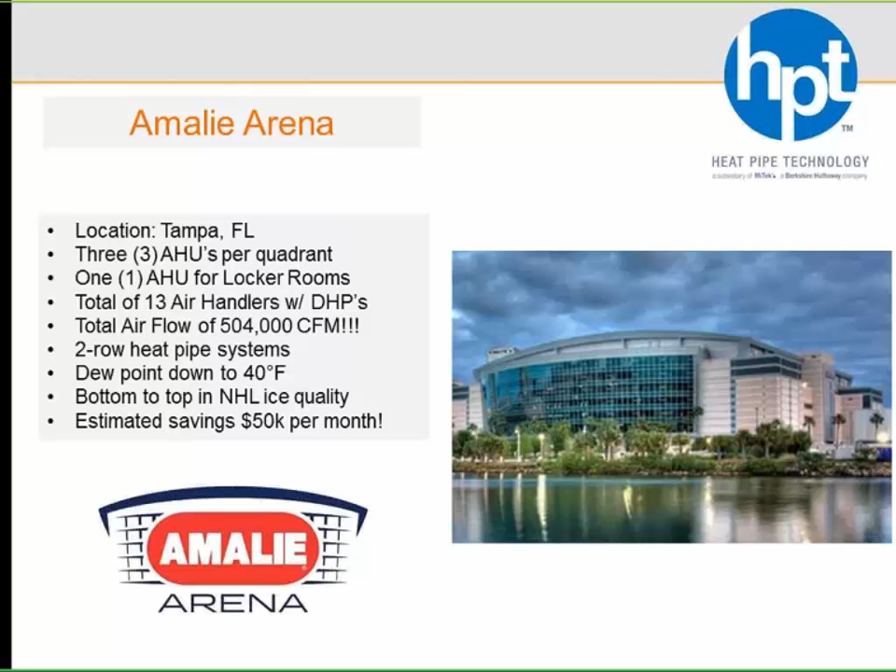Another cool one that's local here in Tampa is at St. Joe's Hospital, where we have some controllable wraparound heat pipes for some OR units and IR units. An OR unit typically always has to be a little bit drier than normal, so they like to see those dew points down a little bit further.

So again, a wraparound heat pipe is a way to take a regular chilled water or DX air handler and drive down that dew point. But by putting control valves on it, now they're able to really control the leaving air temperature coming out of these units, which is of course also critical for OR units.

With that said, I would just like to mention that there is more to come in the wonderful world of heat pipes. We talked about the heat recovery side, and today we talked about the wraparound heat pipe, but we plan to have an ongoing series here, so keep an eye out in your emails.